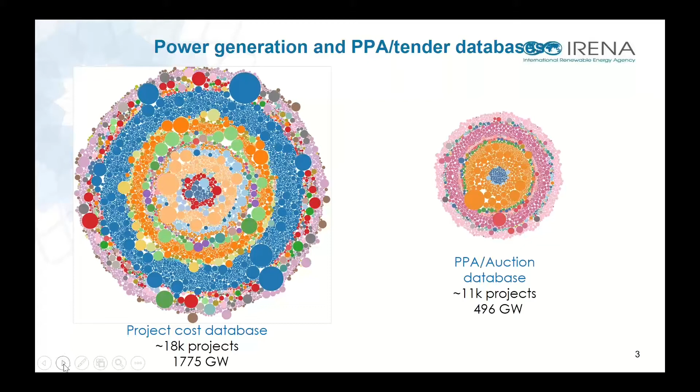In the project cost database, we have total install cost, capacity factor at the project level, and some assumptions for O&M and cost of capital. All that information is hidden in the PPA and auction database, but with the price of these tenders, we do get some interesting information. So what has been the recent cost evolution between 2010 and 2019 for newly commissioned projects?

This is a little bit complicated, this graph, but I'll take you through it because you'll see more of these bubble graphs. Each circle is an individual project. The center of that circle is the levelized cost of electricity on the y-axis. The diameter of that circle is the size of the project, to give you an idea of the scale. The bold lines are the global weighted average for each year, for each technology. On the right-hand side, you can see the declines. At the same time, we have the 5th and 95th percentiles for each year, for each technology. And finally, the fossil fuel-fired cost band runs directly across the bottom of this chart.

So you can see, don't forget about the mature renewables. They're obviously low cost, dispatchable, and help us integrate variable renewables. But solar PV cost fell by 82%, the levelized cost of electricity, between 2010 and 2019. CSP has come down dramatically as well, but is still, at least in levelized cost terms, relatively expensive in 2019. Wind technology is often now very competitive where you have onshore wind.

I just want to focus on the idea here that for the solar and wind technologies, what we've seen is really dramatic cost reductions. And I'm jumping ahead a little bit here, because the 2010 to 2019 values are these levelized cost of electricity. But on the right-hand side, you can see what the PPA and auction results tell us for out to 2021 and 23. So if we click on, hopefully...

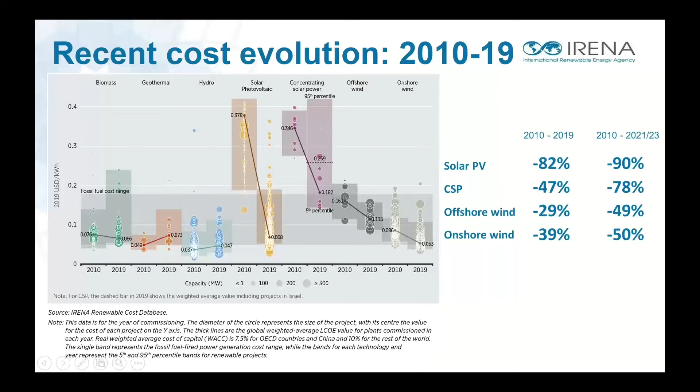This is really important for the energy transition because we see a bright future for CSP, given it can be a low-cost, dispatchable technology because of the low-cost thermal energy storage attached to it.

Okay, Jan, can you click forward one? Great. So what's going on, what are the trends driving this cost reduction, despite the fact we're only at around 6 gigawatts of deployment? First of all, it's a shift to CSP in higher resource areas, higher solar resource area.

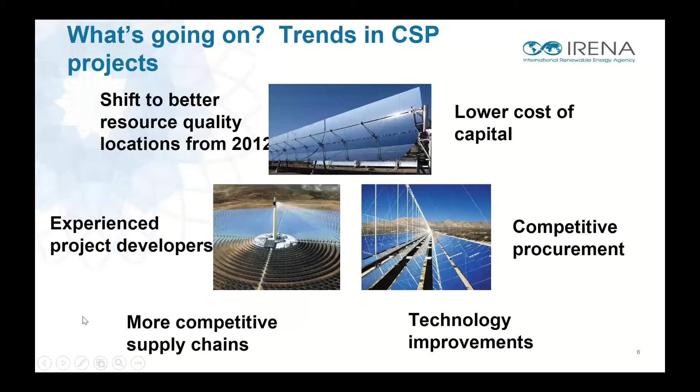We've got a broader range of experienced developers who've developed projects. We've got more competitive supply chains, although they could be a lot more competitive. And we've got the technology improvements that are coming through. Not to forget the importance of competitive procurement, which is really driving cost discovery. And we've seen low cost of capital in many cases.

I talked a little bit about how we think CSP is a very important technology for the energy transition, particularly for the integration of variable renewables through time. So we've looked at the cost reduction potential going forward as well. We've done this in conjunction with DLR, who have a fantastic set of experts in this area and great modeling capabilities. We've basically gone through a process of developing a reference plant, identifying cost differentials and local cost components, to look at where the technology could be with a significant increase in deployment needed to meet the Paris Agreement objectives.

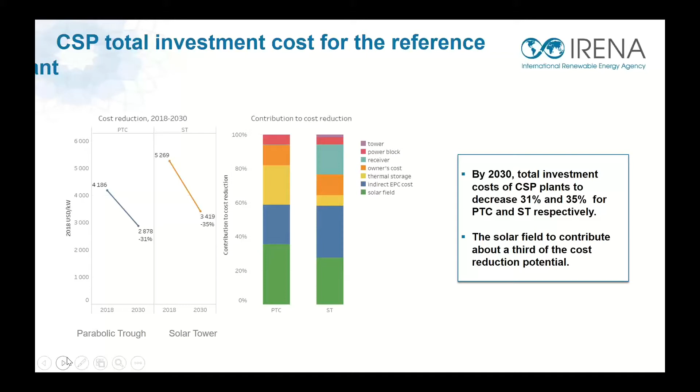And we see a continued potential for cost reduction for the technology of around 30 to 35% in terms of total technology costs, installed costs. The way in which that is unlocked varies a little bit between parabolic trough and solar tower, but we don't have time to go into that in great detail, unfortunately.

And what this means is if we look at the G20 countries with good DNI, by 2030, with this conservative cost of capital assumption that I mentioned of 7.5 and 10%, we can get to some very attractive cost of electricity for what is a dispatchable 24/7 technology.

And we've done extra work with other organizations to try and promote this outlook for CSP, and we released in February a report with the World Bank on this, on the market. So if we can get this growth and scale that is not there now, unfortunately, given the support is relatively weak, we see a very strong potential for cost reduction and a very important role for CSP in the Sun Belt and integrating very high shares of variable renewables.

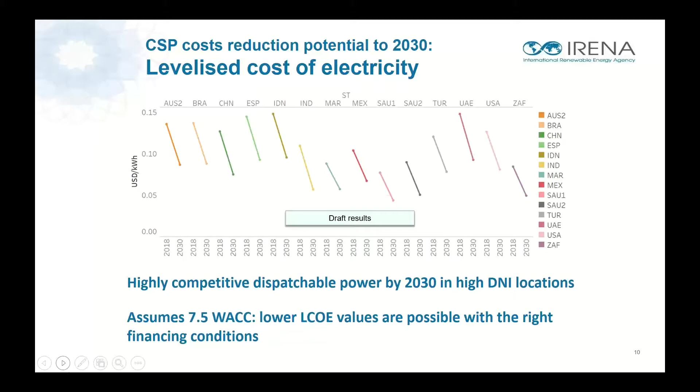But CSP has a little bit of a challenge in terms of it is considered slightly higher cost. It doesn't take into account the value of CSP, and we make that point in the report with the World Bank. But if you start to think about CSP in terms of firm dispatchable renewable energy, it really is all out on its own.

But like I said, CSP with the DEWA project in the United Arab Emirates is really all out on its own, and you have to remember again the difference in deployment between CSP at 6 gigawatts and PV at a lot higher. So does concentrating solar power have a cost problem?

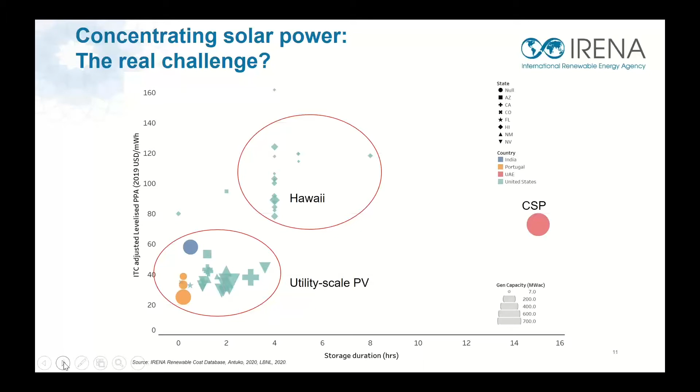Perhaps only if it isn't valued for the services it provides. We're very happy to be doing more work on the end-use sectors, and solar thermal heat we think can play an important part of that. If we're going to meet net zero, we have to do the end-use sectors sooner rather than later.

And we've been working with Solrico and Solar Payback to help fill in what is a really quite significant gap in terms of verifiable cost and performance data for solar thermal heat, notably for industrial processes. And we think this is an important process that will aid policymakers in properly considering solar thermal in the energy transition.

We're trying to do as we do for power gen, so collect project-specific costs and performance data, and end up with a representative database which we can talk about with policymakers and integrate into our models at IRENA, but also researchers can use as well.

We're balancing, as always, the difference between the depth of detail that we ask for and the rate of response. So we're trying to get just enough detail to understand the dynamics around costs in different markets for different solar thermal technologies, but it is a bit of a trade-off.

We're very pleased with the engagement we've had from all the suppliers that's been approached by Barbel and her team. We're up to around 752 data points for large-scale systems globally that represents 786 megawatts of capacity.

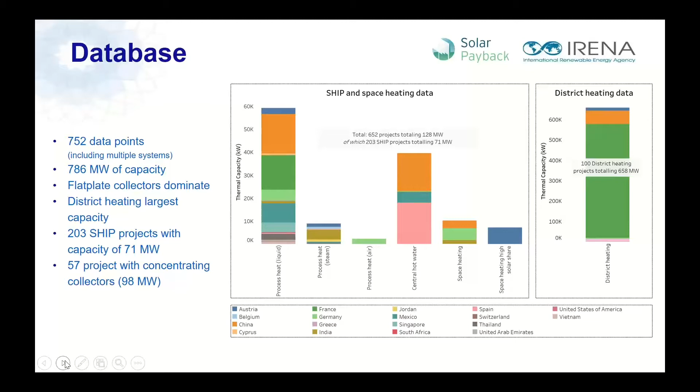Overall, the database is dominated by district heating projects because of the sheer scale compared to the other applications and the relative maturity of the market.

So we have some very preliminary results here that I'd like to share with you. We're in the process of finalizing this database and hoping to publish either before the summer or just after summer.

So if you remember back to the chart which I showed, the cost reduction, say for offshore wind or onshore wind, these are actually really quite comparable cost reductions for very small markets, actually.

So these results were personally a little surprising, but very encouraging considering these are markets that are not growing dramatically. If anything, they're shrinking. So it's very encouraging and tells us a little bit about what might happen if we had more support.

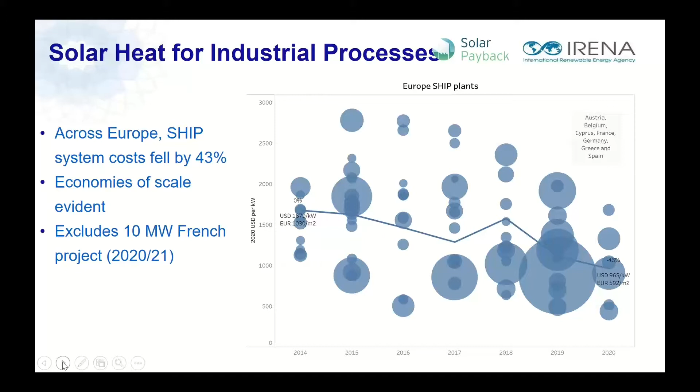Looking at solar heat specifically for industrial processes in Europe, where we can more or less assume we're making comparable decisions around boundary conditions and cost structures, again costs have come down, with evident impact of economies of scale. There's not a lot of projects, but this is the data we have, and it excludes the 10 megawatt French project, which we believe is being commissioned this year. If we added that in, the cost reduction wouldn't be 43%, it would be somewhat higher.

Translating that into a levelized cost of heat with some basic assumptions about a 25-year life and 1% O&M of CapEx, we get a weighted average cost of capital real of 5%, which in some cases may actually be quite high for some of these projects. We see a larger reduction in the levelized cost of heat because the share of projects shifts to areas with better solar resource, so yields are somewhat higher. So there's an even more significant reduction in levelized cost of heat for these projects, although still somewhat high, around US 76 per megawatt hour.

For Mexico, we've had really good response from suppliers sharing data for commercial and industrial projects, and we have good data to 2018, where we see a quite significant reduction in not only the install cost, but also a larger decrease in levelized cost of heat. Here, this is not so much due to projects with better resource, but better systems with greater yields. Unfortunately, the data for 2019 and 2020 is very thin and not really representative, so I'd caution that jump is probably not representative, and we're hoping to get additional data to flesh out those values.

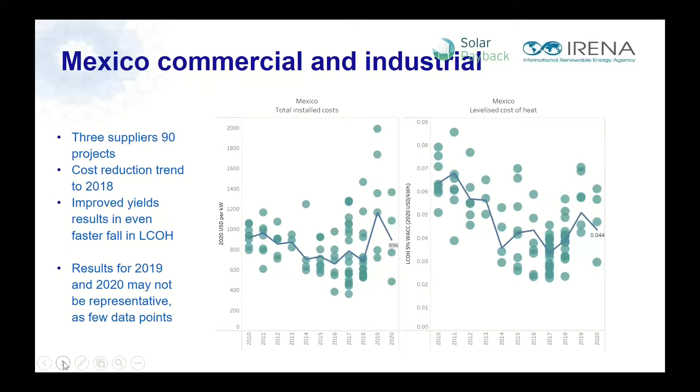So very encouraging data, very good collaboration with Solrico and Solar Payback. In fact, I'd have to say it's the gold standard as far as IRENA is concerned. We're having a great collaboration and really interesting data coming out of it, and we hope to round that out in the coming months, perhaps with your support. Thank you very much for your attention.

Thank you very much, Michael. This is very positive to see that on the CSP side, as well as on the solar process heat side, we are reducing the costs considerably over the last year. This is very promising, and of course we hope to see more and more projects going online in the coming years, to find out how we can bring down the costs even further.

So a brief background. Solarlite has been in this business for nearly 20 years. We introduce ourselves as EPC for parabolic trough collectors.

Parabolic trough is our core component. This is the only product that we offer in different dimensions, designed to operate with different fluids, etc. Our key innovations are direct steam generation. On the right-hand top, you can see a sky view of our parabolic trough power plant in Thailand, 5 megawatt capacity.

It's the world's first commercial DSG plant. And we have also been developing projects, not yet in construction, in the planning phase, to operate with molten salt up to 550 degrees C. I think the rest of the information, pretty much everyone knows it.

CO2-free modular design applies for all concentrating systems. And of course, research is a key integral topic in our company. At any given time, we have 2 or 3 R&D projects running together with key players in this field, like the German Aerospace Center or the CIEMAT at PSA, etc.

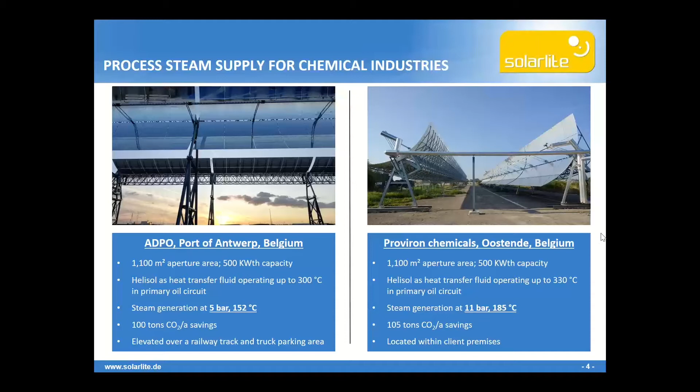So the key point here is: low DNI is not a big issue for the performance technically, and low temperatures don't matter as long as we design the system appropriately. By the end of the day, it's a matter of economics, and every case is different.

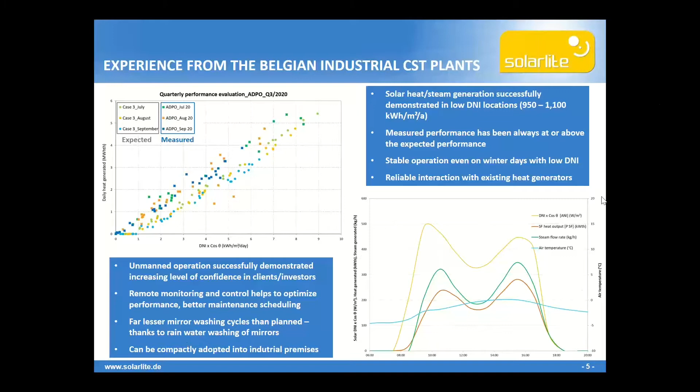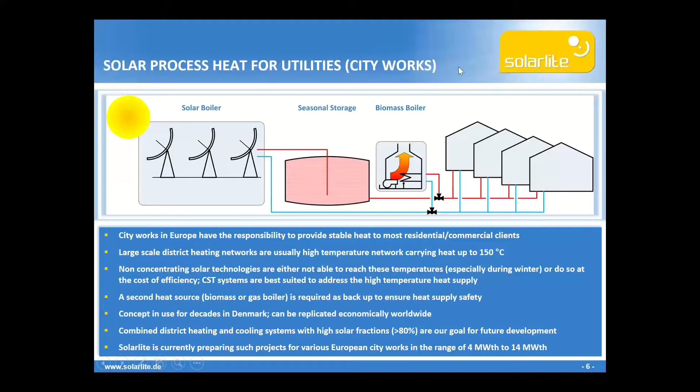And finally, regarding utilities, we are at the moment preparing to offer solar heat to high temperature city works, called Stadtwerke, in Austria, Germany, everywhere. They usually operate up to 140, 150 degrees. We are at the moment preparing 3-4 projects in the range of 4 to 14 megawatt thermal, to apply solar heat, pressurized hot water to these networks, to show we can pretty much integrate into any application and do our best. That's it.

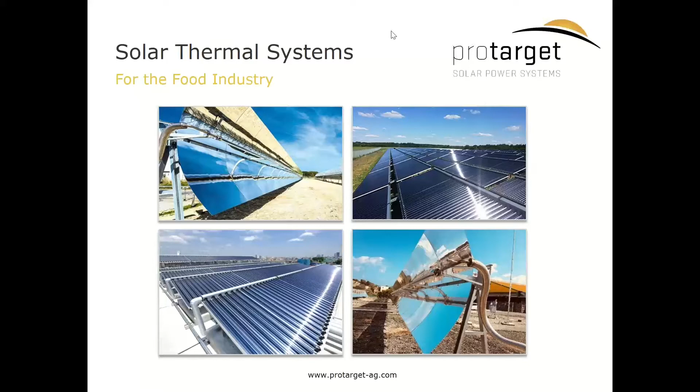A few words about Protarget AG: our company was founded in 2009, specializing in solar thermal systems for industrial process heat and steam generation. Today we offer mainly two solar thermal technologies. One is vacuum tube collectors, so-called CPC collectors, to provide hot water up to 100 degrees to industrial processes. The second technology is CST, using parabolic trough collectors, to provide process heat and steam of up to 420 degrees.

I will now show you an example where we basically used both technologies to provide a food producer with steam and hot water, and show you a bit more about the levels at which these technologies can be integrated. What you see here is the company KEAN, an orange juice or fruit juice producer in Cyprus, very easy to spot when you fly into Cyprus because all the roofs are orange.

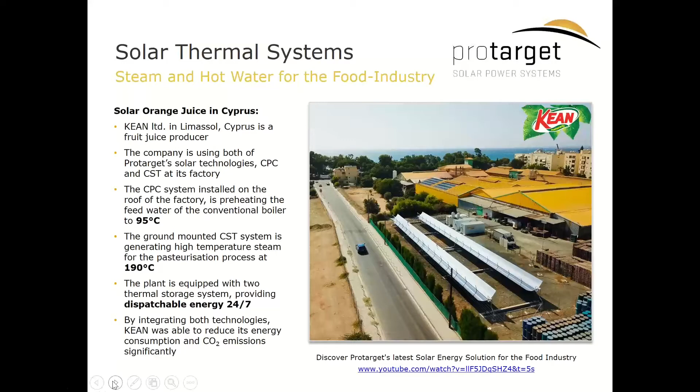On top, you see the parabolic trough solar field, which heats thermal oil to 420 degrees, which is then converted in a steam drum to 190 degree hot steam that is used directly in the production line, in the pasteurization and packaging line of the company. This system is also equipped with a storage, a so-called CTES storage, which uses concrete, storing the energy at a very high temperature level, also to be able to provide thermal energy 24/7.

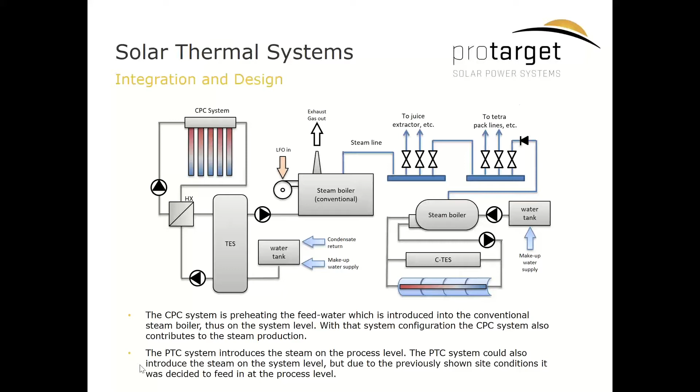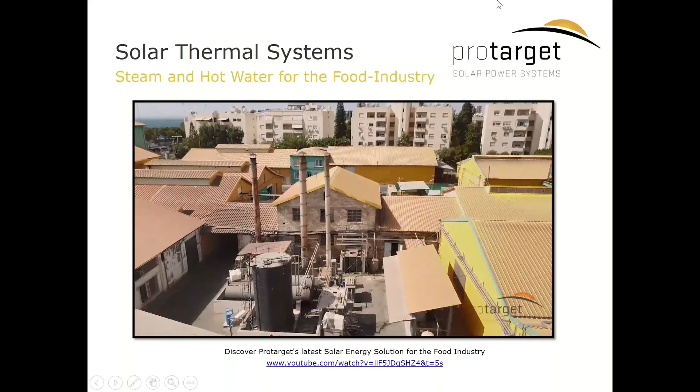I have a short movie for you to show you how this all looks in reality. So you see the roof installed CPC system.

Okay, we have to come to an end. And now the internet died. Not for us, but we have to come to an end. Can you try to start it, Jan? Yeah, I'm trying to start it.

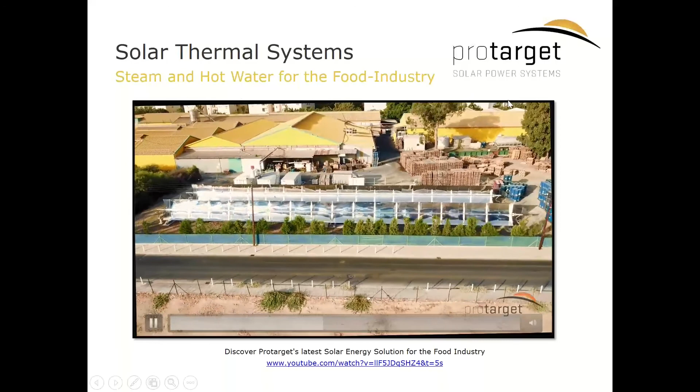Okay, on the left side you see the existing fuel boiler, a nasty dirty piece which you find in most industries still working. Right next to it is the parabolic trough plant feeding directly on the process level into the production process of the fruit juice company.

Okay, thank you very much. I had to cut this a bit short. Can you hear us? No problem. Okay good, because we had a major technical issue in the beginning of the presentation. Yes, thank you very much.

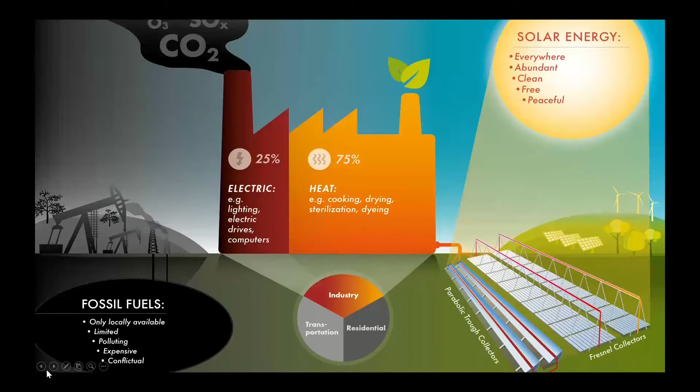That's why our company, Clean Industry Solutions Holding, holds 2 subsidiaries: Industrial Solar and Solar Spring. Solar Spring is an international pioneer in the field of membrane distillation, offering innovative waste and drinking water treatment technology.

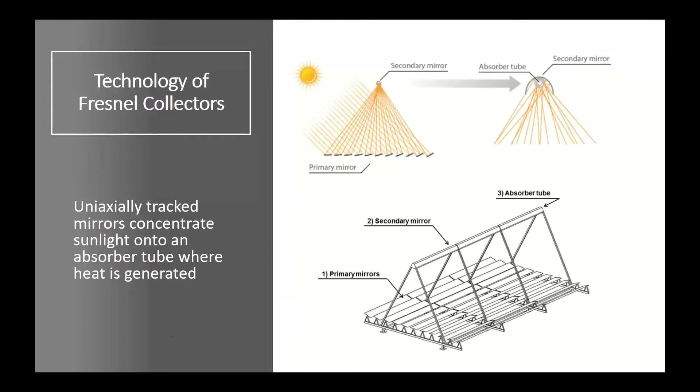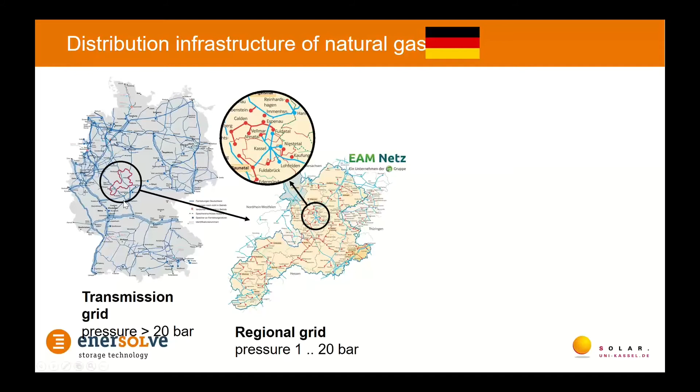Here you see a map of the transmission grid on the left side in Germany, of the gas network with a pressure above 20 bar. If we zoom in around the region of Kassel, you see the regional grid, and all the dots on this map are so-called gas pressure regulating and metering stations. It's the interface between the different pressure levels in the network, similar to a transformer station in the electric grid.

In Germany, we have above 5,000 of these stations all over the territory, with a heat demand of about 1 terawatt hour a year. What's very interesting is that the temperature range for the heat supply for these stations is around 30 to 80 degrees, so it's very interesting for integrating solar or renewable technologies.

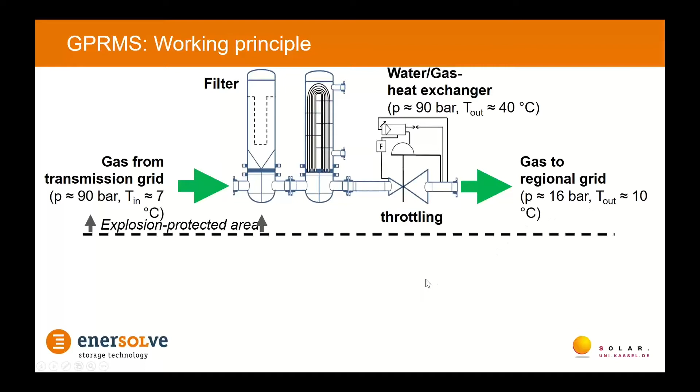Here you see on the left side the gas coming from the transmission grid at high pressure. The gas is filtered and throttled, and at the output of the throttling you get a lower pressure, and if you don't do anything, you'll get a negative temperature, in this case minus 20. So what is done to avoid that is to preheat the gas with this gas-water heat exchanger, and the state-of-the-art system does this with gas boilers.

Approximately 2.2% of the energy flowing here in the form of gas will be used to preheat the gas, and for large stations you can have up to several gigawatt hours per year of heat demand. Here you see a typical heat demand profile of a station, and you have a strong seasonality, with a ratio of 1 to 5 between summer and winter. Of course this varies depending on the station.

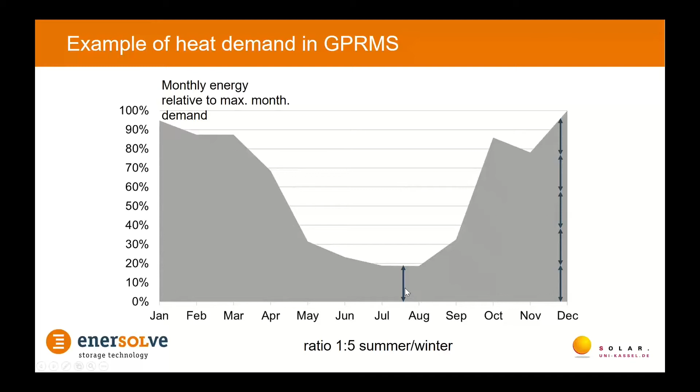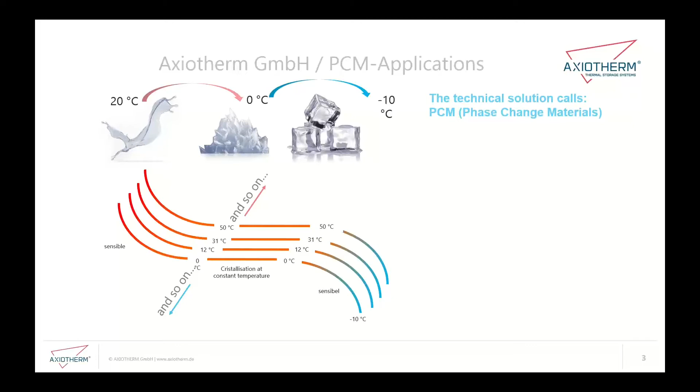So it's necessary to have other PCMs, phase change materials with different temperatures, higher or lower. Everything, we have. And what is the big benefit? We have the highest energy density at this heat transition point.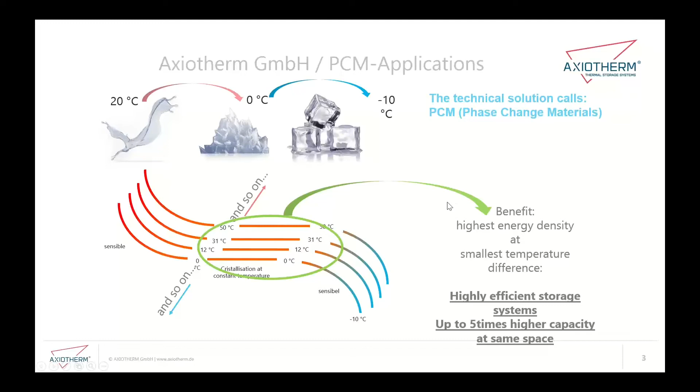At this moment, we have the smallest temperature difference and can realize highly efficient storage systems with up to 5 times higher storage capacities in the same space compared to, for example, sensible systems. The technical application is very easy: just take something like a vessel, put in our macro-encapsulated phase change materials, let water flow through, and we have a ready for work phase change material storage system.

The first project I'd like to show you is a PV to heat project in Denmark, together with the Suntherm company. We have 23 houses, each with a heat pump, a PV system, and a PCM storage system. They are all connected by a web cloud system management, and we have the feasibility for weather and electricity prices. We realize maximum PV self-consumption and minimum electricity costs. One main point is that we increase heat pump efficiency by up to more than 42%.

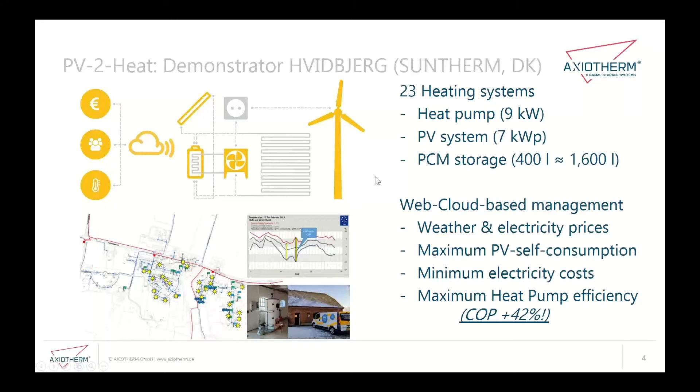This is a fantastic value. You can't reach this with a technical modification alone. We have also realized this technology as district heating, so you can see there are a lot of chances.

The next project I'd like to show you is PV to cold. Cooling energy is very important for the future because we will have a lot of demand for cooling rooms, and cooling energy is around 5 to 6 times more expensive than heat energy. You can see a 50,000 liter storage system in the Futurium, in the center of Berlin, close to the Bundeskanzleramt. We have 5 tanks, each with 10,000 liters, optimizing the technical building systems.

We use peak load reduction, for example for events where you need a lot of cooling power, by peak cutting shifting. What is peak cutting shifting? Very easy. You see the red line there, and this is the highest power of the chilling machine. If you have an event and need much more power, what do we do with the peaks? We just cancel, or cut the peaks away.

We store this energy beforehand in the PCM storage systems at 12 degrees Celsius in this case. Then, if we need much more power, we start to deload the storage systems and have enough power to cool the whole building. By this, we have maximum self-consumption of the PV system, because each watt we produce goes directly into the cooling storage. We have maximum COP through load shifting, with the PCM at 12 degrees Celsius.

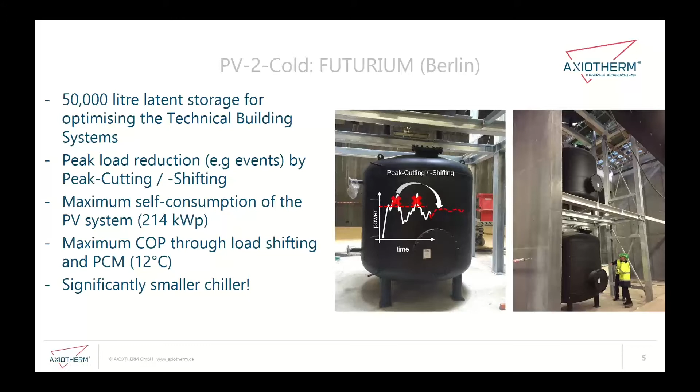It's close to the chilling machine, an absorption machine at around 6 degrees Celsius, and the small temperature difference is a major advantage. We have a significantly smaller chiller, which is very important economically. You can see another picture on the right side. And now I'm ready, thank you very much.

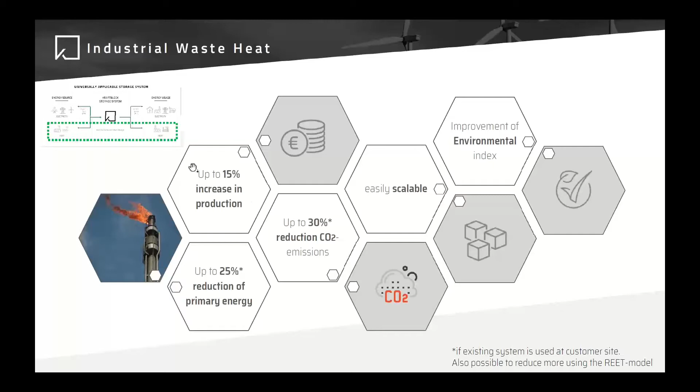I will not show now the pilots in those industries, but one application we really like and our customer likes is a mobile storage system. This is a very small container, 7 cubic meter container with the whole system, and it stores 2 megawatt hours of useful energy at a 480 degrees C level. So very compact, high energy density for a sensible system.

I don't do anything, so let's skip through the slides. Let's see if it works now.

Okay, so we call it renewable energies in existing technologies. Why? Because we usually try to replace, for example, a conventional fired system against a renewable supported system. This could be CSP, this could also be renewables from renewable electricities from PV or from wind farms. This is quite attractive also to our customers, mostly outside of Germany, because there are also subsidies which support those solutions. But that's definitely highly interesting.

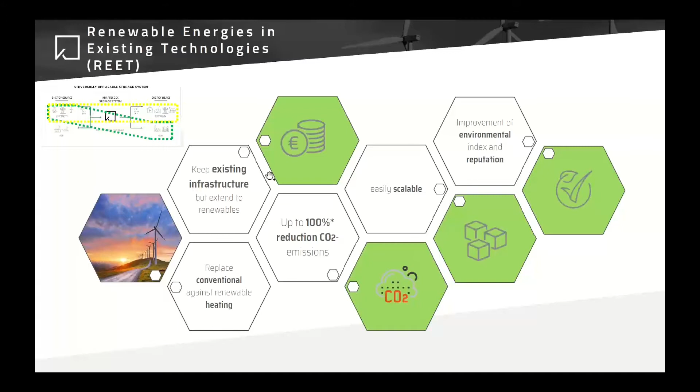What we are also looking for, I would like to present a project in this scale, but it's not allowed yet. It will take 3 or 4 weeks, then we will show the results.

CSP is also very interesting for us, but not, let's say, the old way of CSP using molten salt as heat transfer media and heat storage system, more the new applications which are using also hot gases as heat transfer media and targeting temperatures like 1000, 1200, 1300 degrees C, because there our storage system is really the perfect fit to those systems.

The interesting thing about our storage system is also that you build the system like an open technology system. It means you can charge it by thermal oil, you could charge it by molten salt, you can also charge it by hot gases. So it's a universal range. It could be charged. Of course, you have to tailor the interfaces, but the internal of the storage is always the same.

What we started actually a couple of weeks ago as a joint project together with UPC, DLR, SPF, and a couple more partners, is the advanced thermocline concept for thermal energy storages. At least it means it's a combination, a hybrid system using our solid state material as a cheap but highly efficient filler, in combination with molten salt technology, in order to reduce the costs of those systems.

So I think we are very well aware of the opportunities for the future, especially for CSP. We try to build our storage so that it could be used over there, and hopefully it will. Thank you.

This can be either steam directly, then process heat, or re-electrification or compressed air, or as we have in the Eni project, a combination of this.

The battery system is modular. You see one module here, a 20-foot container. We also have a 40-foot container made of a special Coca-Cola recipe concrete developed with Heidelberg Cement, and stores approximately 2 megawatt-hours each module, and then you size just the battery to whatever is needed for the specific application.

The applications are quite vast, so we have on the left side industrial applications like the electrification of industry, or just waste heat recovery from steel plants, for example, or ceramics, then flexibilization of power and heat generation. And you see here on the right-hand side the case of the concentrated solar power project with Eni.

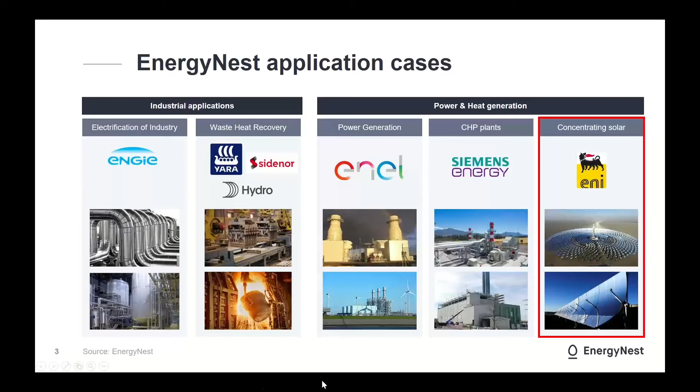The moving of the page is not really easy. Okay, so coming to the specific project of Eni, we're actually quite happy with this project because it's sort of a showcase. Eni having also within its decarbonization strategy to be carbon neutral by 2050, converted the crude oil plant into a big biorefinery, and with our thermal battery, we then add to this by further greenifying this facility.

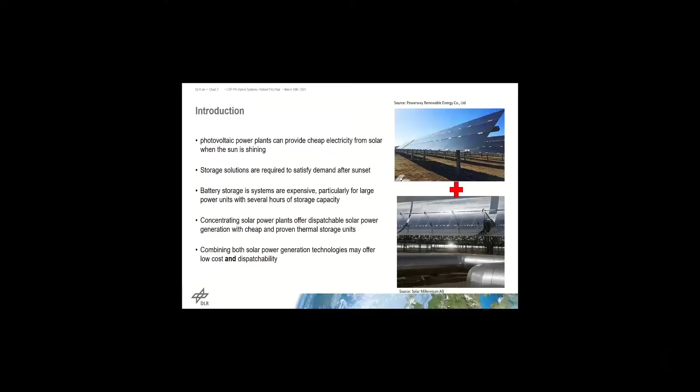Okay, the talk is on solar hybrid CSP PV technology. The question is, of course, why we are thinking about that. Some of the facts that you are probably all aware of is that today photovoltaic power can provide very cheap electricity during sunshine hours. We have achieved costs that are in good solar sites even below 2 cents per kilowatt hour. However, in order to supply energy after sunset, storage solutions are required.

One of them is, of course, the obvious one, a battery storage system. But we all know that this is still relatively expensive, in particular if we look for very long storage hours, for many hours of storage, 5, 6, 10 hours, then these systems become a significant cost factor that is far above the cost of electricity production.

On the other hand, concentrating solar power has typically an integrated thermal energy storage system, and in this combination, we will talk on that a bit later, storing of energy, shifting of energy is a very efficient and cheap option. The talk is then on the question, can we somehow benefit from the combination of both, integrating the technology?

Start with the PV power plant, a very simple sketch here: the PV system directly connected to the grid allows the lowest levelized cost of electricity, but as I mentioned before, it's actually non-dispatchable. If we have a battery, then we have to consider investment costs for the battery system in the range of 200 to 400 euros per kilowatt hour. You may keep this number in mind when we later on talk about the cost of thermal storage.

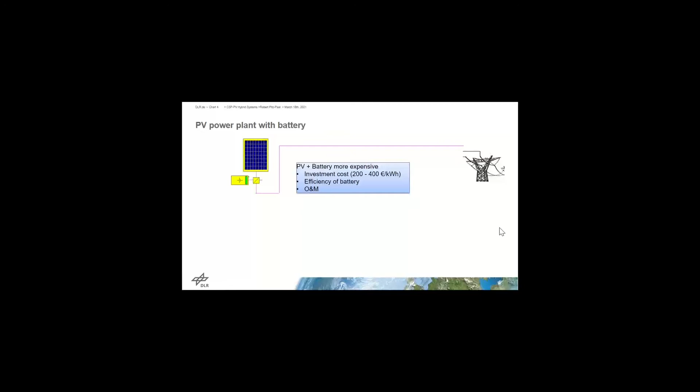We are not only paying for the battery investment, but we keep paying also a bit for the efficiency loss in the battery. So putting energy into the battery and back gives us some losses. In addition, of course, we also pay for the operation and maintenance, in particular for the fact that the lifetime of the battery is actually not the same as the lifetime of the PV module.

On the other hand, you know the concept of a CSP plant. CSP, in this sketch, a parabolic trough system, is linked to a thermal energy storage two-tank system, as it's shown here, with molten salt. The storage, the salt, is stored.

Sorry, can I go back? Not sure how to do it. It was not moving by itself. Juliana, can you switch this back? Oh, yeah, I will hand over. Jan, can you please switch the slide?

He's in charge. Back, okay. Not forward, please. It's not going back. Oh, you want to go back? Okay, back please. One slide back. Yes, exactly.

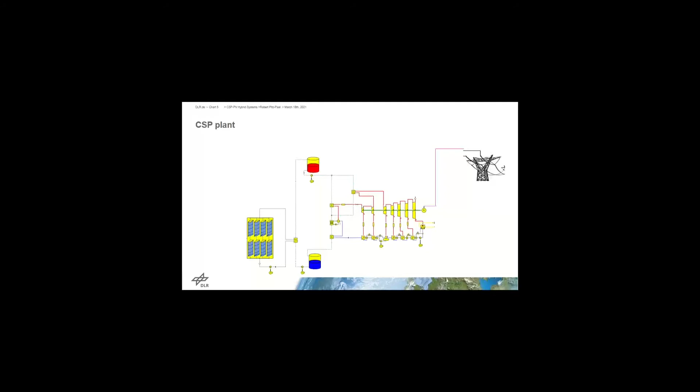So we are talking about CSP and the integration of a thermal energy storage. Let me show you the benefit or difference between integrating a storage in between the collector and the energy converter. This comes if you consider that a solar system provides high temperature heat for about 2,000 full load hours a year to a power plant.

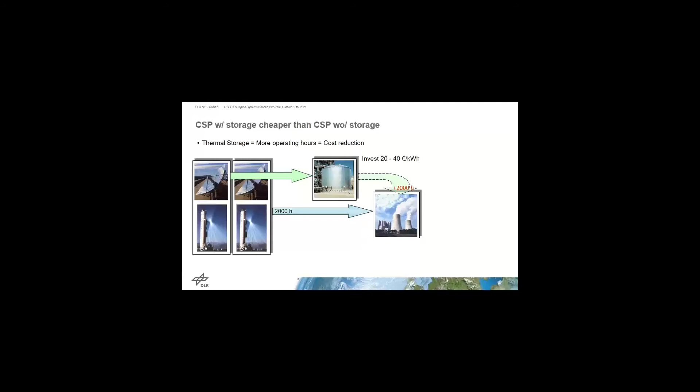If you add a second part of a solar field that provides energy at the same time to the storage, the power block can actually produce energy for a longer period, maybe hold through the night, 4,000 hours. This is by adding an investment in the range between 20 and 40 euros per kilowatt hour, a factor 10 lower than the investment in battery. So the cheapest CSP electricity cost is not at no storage; rather, costs get lower if we integrate a storage and operate the plant for more hours of the day or year.

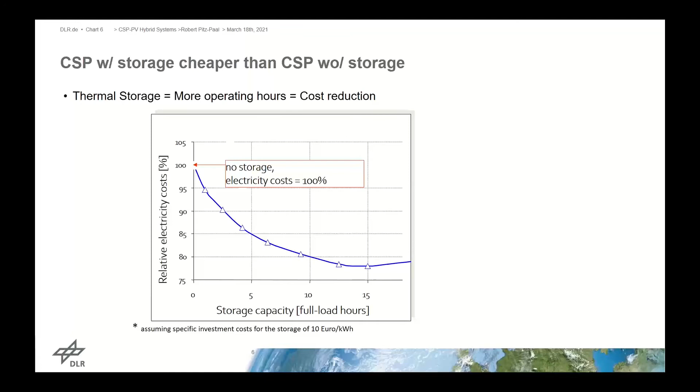So the question is, if we really want a system where we have to provide a certain fraction of power production during nighttime, or where we have a time-of-delivery tariff that favors nighttime production, then combining both technologies may get us a cheaper system through the combination of these two options. So let's take a look.

Next slide, let me see that. Not moving now, not sure how this movement is performed. Can somebody shift the slide now? I can't. Yes, thank you.

So the combination of both systems may work in a way that the CSP system and the PV system both provide electricity to the grid, but in addition, some of the PV electricity may be integrated into the thermal storage. This may seem counterintuitive at first, because the efficiency chain of converting electricity to heat and back to electricity is not very favorable. But when we consider the cost situation in combination, we see there is actually a benefit of this option: the electrical heater adds energy to the thermal storage in case there's surplus energy.

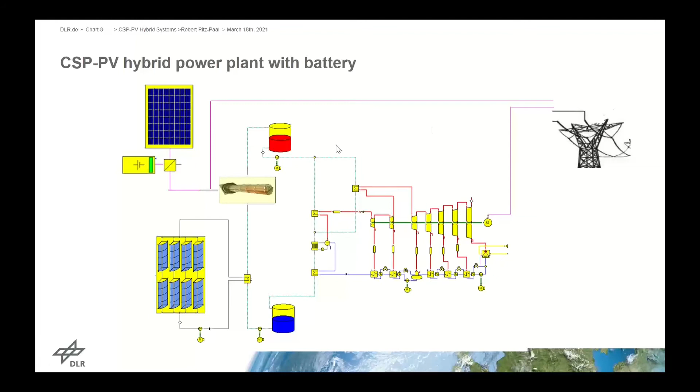Let's take a look at the next slide. A general layout: we can distinguish between two options. One is that the CSP plant and the PV plant may be connected to the same grid and operated in a way that they match the load. But if we co-locate them, there's an additional benefit: we can access the same grid and share the same grid access.

We can share the storage options, we can share the O&M team, we can simplify the project development, site preparation, environmental impact studies, and other things. We can also provide more flexible bids to the grid because of the better integration. All in all, this may lead to an increased profit in the concept of this hybrid system.

Hopefully we can move to the next slide. Let's look at the components of such a system. Of course, it's a more complex system: we have a PV system, maybe in addition a smaller battery storage as an option, we have a solar collector, an electrical heater system, a thermal storage, and we also have a power block.

In many cases, it's very beneficial to combine a single-axis tracking PV system with the system, because they provide a very similar daily pattern of energy provision compared to a parabolic trough system. We will see later that this is of certain benefit here.

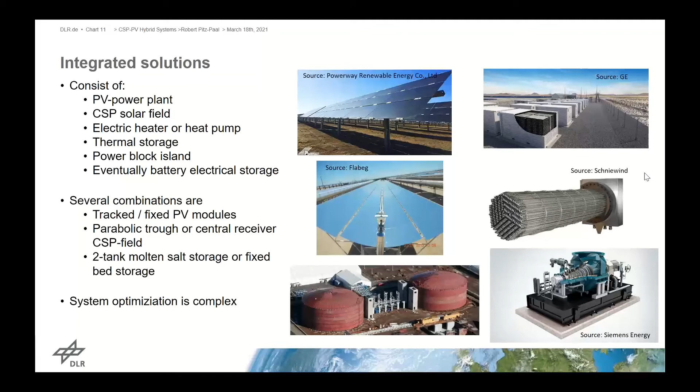So in this case, where we integrate a parabolic trough and a single axis tracking PV system, there's the chance to put the heating of the molten salt in a serial arrangement. First, we heat the salt with the parabolic trough to a certain temperature, then we add additional temperature with the electrical heater. It's important that the energy is provided consistently during the day, and single axis tracking PV and CSP systems have similar characteristics, so this matches well. The benefit is that the temperature limit of the parabolic trough, due to the heat transfer fluid and concentration, can be significantly increased, allowing the power plant to operate at an elevated temperature with better efficiency.

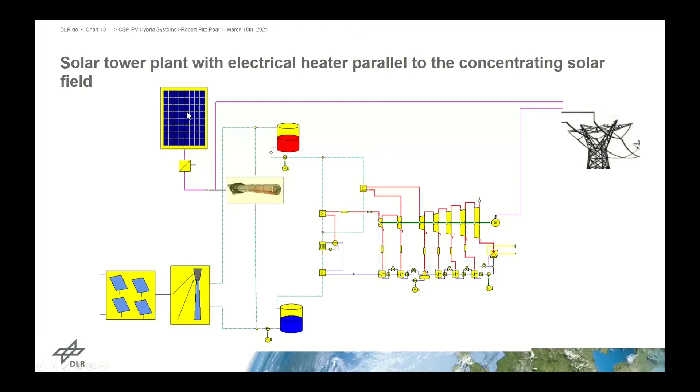The other option is to connect it in parallel. In this case, the heat production and the production by the electric heater are put in parallel, and we can independently charge the storage from the PV and from the solar field. This may be the case because the optical characteristics of a solar tower and of a PV system may be different.

So how can this actually work? When we want to provide base load power, during the daytime we have energy from the CSP plant and energy from the PV system. Typically both systems are designed so that during the nominal time of day, excess energy is available, and this excess energy is provided to the thermal storage, or maybe to the battery storage if a smaller one is available. In this combination, energy from the battery storage or thermal storage can be used to operate the plant for longer hours after sunset, or around the clock. Both fractions of this energy input can be combined this way, and it's a question of optimization how large the contributions of the two systems are—it depends very much on cost, efficiency, and so on, so there's no general answer.

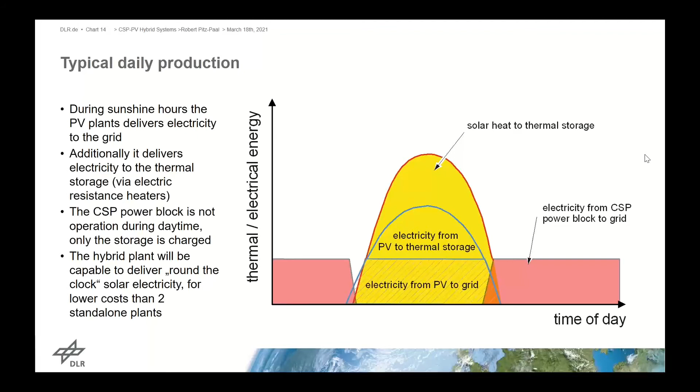One additional benefit relates to auxiliary consumption coverage. CSP plants, when operated during the day but not producing electricity, don't have the power to operate their auxiliary units—the pumps, heliostats, or collector tracking. The combination of the two systems gives the chance that even when the power block isn't running, energy for the auxiliary units can be provided by the PV system. So both systems run independently, and auxiliary power consumption is covered by the system itself at all times, not by the grid.

So, what is the optimal system? There are many degrees of freedom you can use, and the optimum always depends on specific boundary conditions—what power demand is needed, the price of components, and many other aspects. I'll show an example here, which isn't fully representative, but illustrates the factors you can play with.

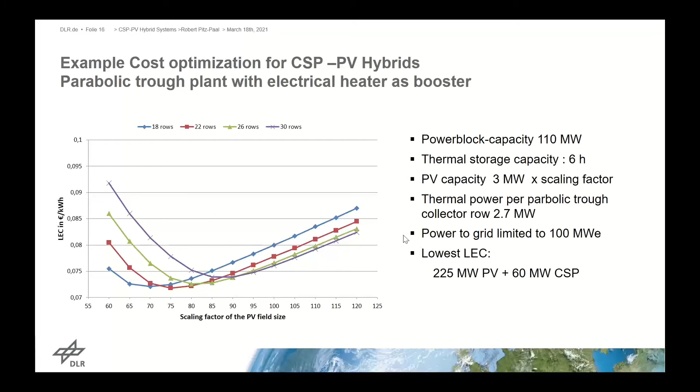Okay, this is just the conclusion. Well, I hope I could show you.

We have some, okay, microphone here. I think Stephanie Randig tries to get in. We can hear you. Unfortunately, you might switch off the microphone and turn on the camera if it's possible.

Thank you. Okay, just to conclude, I hope that I could show you that these combinations of CSP PV hybrid power plants have really a chance for a low-cost, cheap dispatchable solar electricity supply by optimizing both systems in a way that they perfectly fit to the load curves that you want to do, and you can do this cheaper than with a simple CSP system with storage or with a PV battery system.

Of course, the system looks very different depending on how long the storage capacity or the load is actually needed. And of course, the system also depends very much on the subsystem's cost. As we see a very quick development on these costs, it's very difficult to say this is the perfect optimum solution. It may be a year from now different in the cost situation, and then a different optimum solution will be there. But as you also could see, these kind of optimums are relatively large, so it's not really a problem, and you wouldn't do very big mistakes in this design.

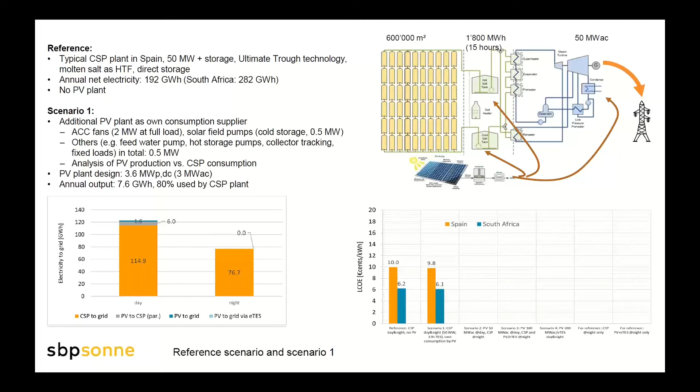With scenario 1, as Robert mentioned, we assumed a small PV plant designed just to support the CSP plant and deliver its own consumption. With this small PV plant of about 3 megawatt peak AC power, we can increase the net output by about 6 or 7 gigawatt hours, and the LCOE finally decreases by about 2% for both locations.

With the next scenario, the second one, we reduced the solar field, the parabolic trough field, from 600 to 380,000, and doubled the PV plant capacity to 50 megawatt, so it can also deliver electricity to the grid during the day. It replaces the solar field of the CSP plant, while the CSP plant only charges the storage during daytime and produces electricity at night from storage. With this configuration, LCOE in Spain decreases significantly, by about 10%. In South Africa, it's also going down, to 5.9.

Then scenario 3 is also on this slide. We again increased the capacity of the PV plant, doubling it to 100 megawatt. As Robert mentioned, we can additionally charge the storage by means of electrical heaters during the daytime from the PV plant. In this configuration, the PV plant delivers about a third of the electricity at night, while the other part still comes from the CSP plant. At daytime, the PV plant delivers 160 gigawatt hours in Spain.

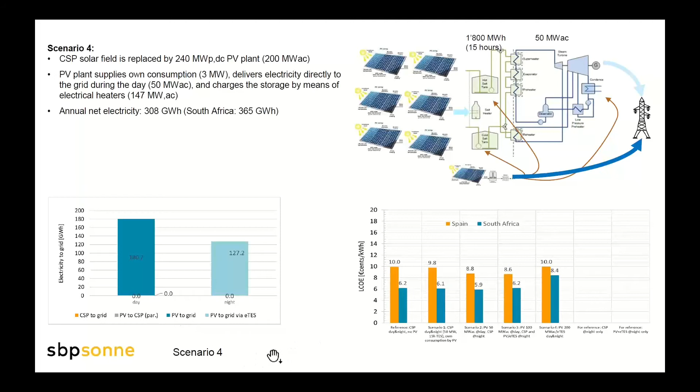Now, next slide, please. This is the final scenario, where we fully replace the CSP solar field with a 200 megawatt AC PV plant, which charges the storage via this eTES concept and delivers electricity to the grid in parallel during daytime. By this, the LCOE ends up higher than for the other configurations, both in Spain and South Africa.

So, I come to the conclusion. In South Africa, as an example of a very good CSP location, the most economic configuration is the one where the PV plant has nominal power capacity and delivers electricity during daytime, while the CSP plant delivers at night via the eTES system. The eTES concept is less economic at a good location.

In Spain, as a mediocre location, it makes sense to oversize the PV plant and also supply some electricity via the eTES system at night from PV. Nevertheless, for both locations, it's still correct that if we look only at the LCOE at night, meaning the plants are only allowed to provide electricity to the grid at night - which might not be a realistic scenario, but is mentioned just for comparison - the LCOE for the CSP system is much lower than for the PV and eTES system.

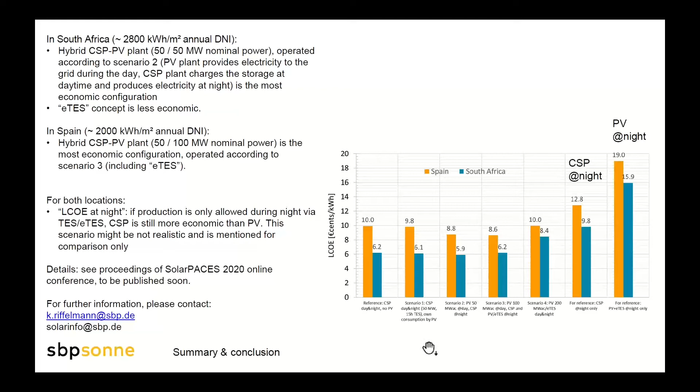I'd like to mention that the cost assumptions and other details of the study will be published soon in the proceedings of the last SolarPACES conference. You'll see my contact details here. If you have any questions, I'm happy to answer.

Thank you, Juliana. Hello, everybody in this web session. I'm going to speak about integrated CSP PV hybrid systems, what we call briefly ICPH, and in particular I want to focus on its fit to the green energy for hydrogen industry. Before I start, I want to emphasize that we always distinguish the integrated systems we've developed at TSK Flagsol, for instance for the application in Morocco, from simply co-located plants, because we believe and can show that those integrated systems are more efficient and more advantageous in terms of LCOE.

This integration has mainly two effects. The first effect is we increase the delta T between the cold and the hot salt, which means we can increase the storage capacity. And second, due to the increase of the temperature levels, we improve the efficiency of the water steam cycle.

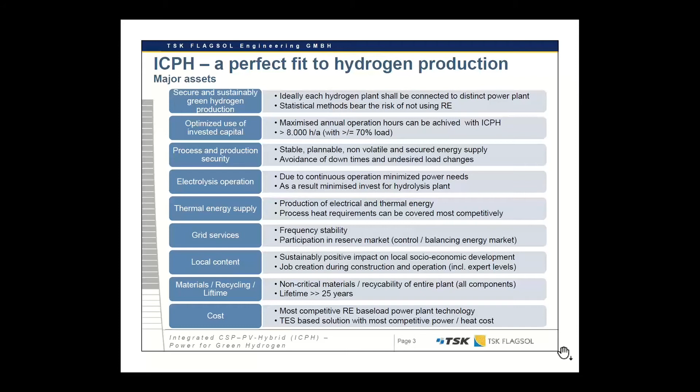I know that's a lot of information in 5 minutes, but I'd be happy to answer questions later if some come up. Thank you for your attention.

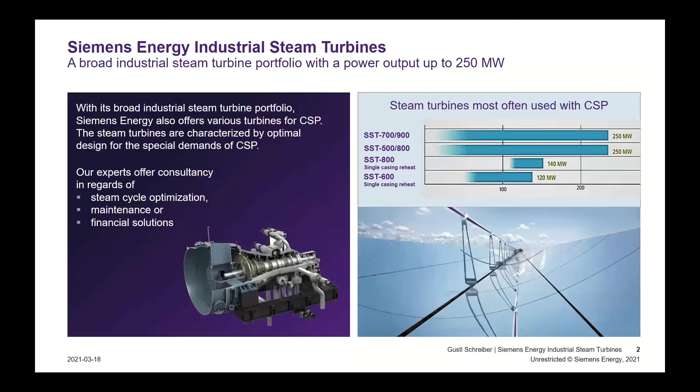With our broad steam turbine portfolio, we offer turbines for different types of CSP plants. In addition, we support the steam and water cycle optimization for our customers and help them find the best possible plant design.

Based on our experiences in the CSP market, we want to share our ideas regarding the integrated CSP PV hybrid concept. With this new concept of hybridization, an enhancement in performance can be achieved. In an ICPH plant, the molten salt is heated up in 2 steps. In the first step, the cold salt tank is heated by parabolic trough to a temperature level of 390 degrees Celsius. In a second step, a photovoltaic system and electric heaters are used to further heat the salt, reaching a temperature level of 560 degrees.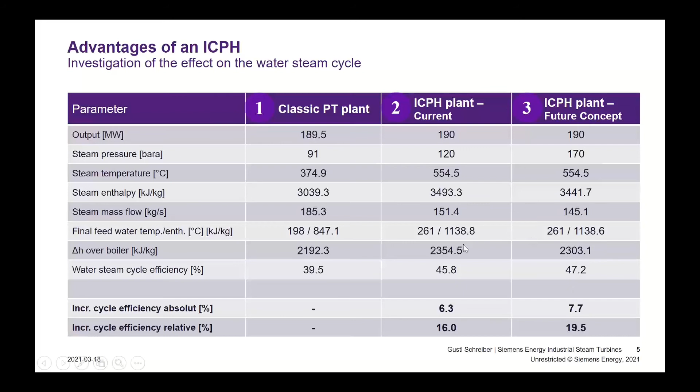Let's also look at the salt cycle. In the ICPH plant, the salt in the hot tank is heated up in 2 steps: step 1 by parabolic trough, and step 2 by a photovoltaic system and electrical heaters. In the classical design, we have a usable temperature difference of only 117 Kelvin. In the ICPH design, we have instead a usable temperature difference of 287 Kelvin, which is an obvious advantage. Comparing the classic PT plant and the ICPH design, we see a significant decrease of more than 60% in the needed salt flow and the salt tank design.

In addition, we have shown with our calculations that there is further optimization potential.

Now I want to summarize the advantages of the ICPH plant design. Due to the hybridization, we see significantly reduced salt flow and salt tank sizes. Because of a higher water steam cycle efficiency, the total amount of needed solar energy is reduced as well. In total, a reduction of the plant LCOE can be achieved, and the future concept shows further optimization potential.

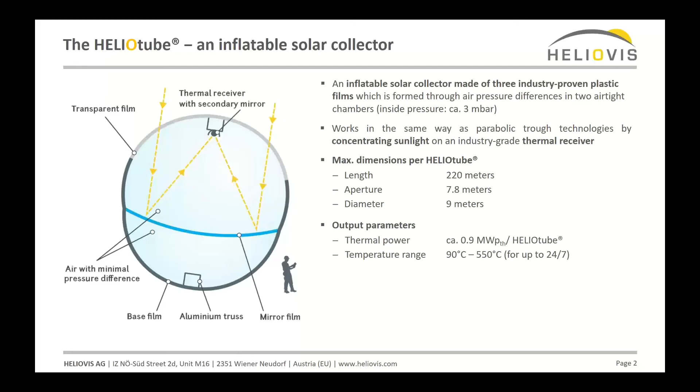The length is 220 meters, so that's the equivalent of 2 football pitches, and the diameter is 9 meters. Output parameters: we have 0.9 megawatts of thermal power per heliotube, in a temperature range of 90 to 550 degrees, for up to 24 hours with appropriate storage technology.

Now, the system has a number of specific features, and I'd like to focus on 2. One is the entire technology is designed for harsh desert conditions and maximum durability. And the other, due to the special features of the design and the materials used, we have 55% lower capex and 20% lower opex versus the standard parabolic trough technology, which leads to a cost of thermal energy that is really very suited for industrial process heat and water desalination. I'll say a little bit more about that later on.

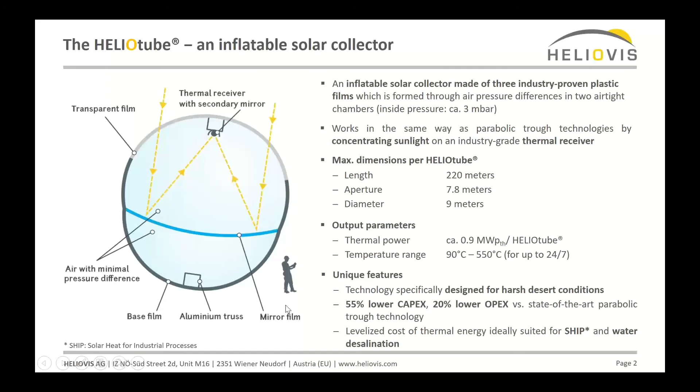Now, what is of course a little unusual about this is that our standard solar field would be 30, 50, or 100 of our heliotubes, and here it's only 1. Now, a really interesting market in which we're experiencing a lot of traction, next to the industrial process heat market, is this market for water desalination.

As I'm sure you're all aware, water scarcity is already an issue today, and it's becoming more pressing every year. It is being addressed with desalination plants, and the dominant technology, with over 95% market share, is reverse osmosis. This operates at high pressures, therefore needs to run 24 hours a day, and therefore requires constant energy supply. And since they run on electricity, they need baseload electricity.

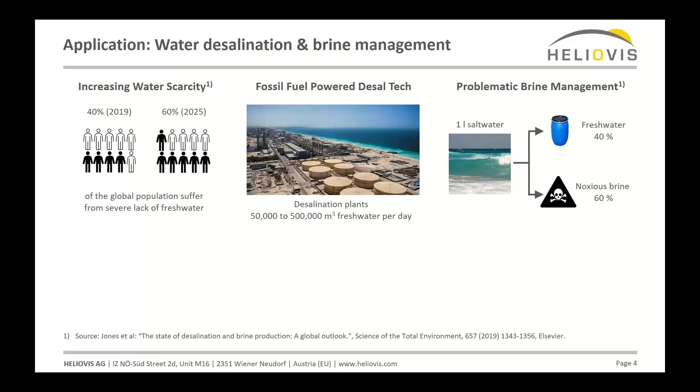Often, large plants are situated directly next to power plants, as in this case, leading to a heavy carbon footprint. The second issue that this technology has is that the rate of water recovery on global average is about 40%, meaning that for every 100 liters of salt water, you produce 40 liters of fresh water.

And 60 liters of concentrated salt solution, which is usually pumped back into the ocean close to the coast, where it leads to damage. So if we're going to tackle the global water problem with this technology, it's going to come at a heavy ecological price. And there are alternatives, and we can provide one of them together with a technology partner.

This partner has a desalination technology that runs primarily on heat and does not use any high pressures. Together we can deliver water at competitive price levels with very little or even no brine, no salt solution. And the system is self-sufficient in energy and therefore CO2 neutral, with the added benefit that we can work off-grid, which in many of our target markets with their infrastructure challenges is a great benefit.

We've developed a system based on standard units, which we can use multiples of and therefore scale the system. Each unit produces 6,000 cubic meters of fresh water per day, and we achieve recovery rates of up to 96%, the remaining 4% being basically wet salt.

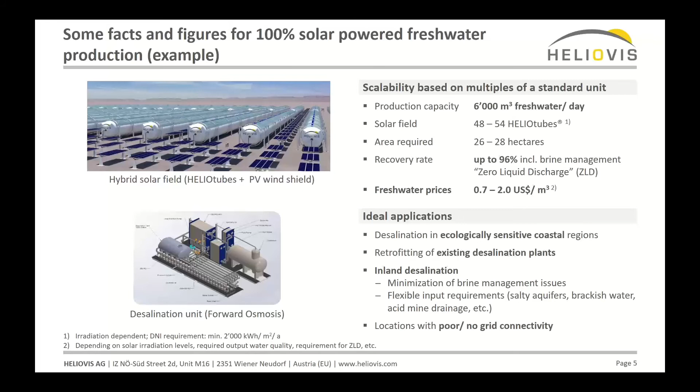We're currently working on our first projects, and I hope to be able to introduce these to you next year. With that, thank you very much. And if you're interested in our technology, we would love to hear from you. Thank you.

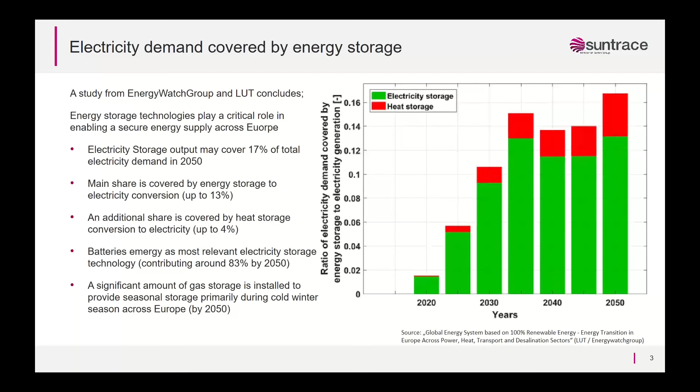It also involves, as they say, a significant amount of gas storage—considering green gas created from green hydrogen, for example—that could provide seasonal storage, particularly for Europe. But I don't want to emphasize this too much. The other part is, of course, not only about electricity, it's also about heat, and we've seen a lot of examples in the different presentations.

That shows that for heat generation, you would mainly be using thermal energy storage. Of course, you can generate thermal heat from electricity, but you can also generate it from other sources like CSP. Thermal energy storage for heat will cover a large part of the heat storage output in the years to come. Power-to-gas, green gas, will also contribute some part of it. But in particular, when it comes to phasing out fossil heat generation, that will definitely increase the requirement for heat from thermal energy storage.

You can see that the share where electricity is converted to thermal heat is not as large from an electricity storage as it would be from a thermal energy storage in the first place. Please go to the next slide.

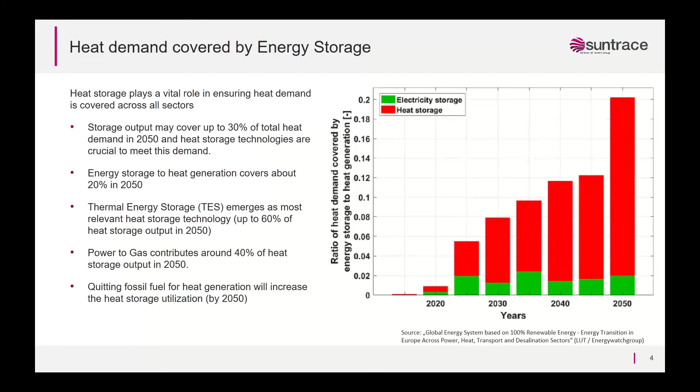They also say that effectively that can be done over the next 30 years, reducing the cost, both the levelized cost of electricity, LCOE, but also the levelized cost of heat. And that implies the use of storage.

A lot of discussion today is about energy storage being too expensive, with no business case and a lot of issues. But when we want to go to 100% renewable, we need business cases for storage and a scaling of the different applications. I found it intriguing to understand that for the energy transition in heat, and even in electricity, we need thermal energy storage, not just electricity storage.

As can be seen here, it's not about either or, it's both. Like previously, we had a lot of discussion about either PV or CSP - who is the winner of the competition on solar electricity? There is no winner in the sense that both will have some contribution, one maybe bigger and one smaller, but you cannot leave out one of them. The same is true for storage.

I wanted to bring this up as food for thought, to take our heads out of the individual project details and all the figures presented, and give a heads up that every one of us, presenters and the crowd, is going in the right direction. What I think we as a whole industry need to work on is removing barriers, getting a level playing field for those applications, and finding the funding and payment mechanisms that allow a ramp up of manufacturing and implementation of storage.

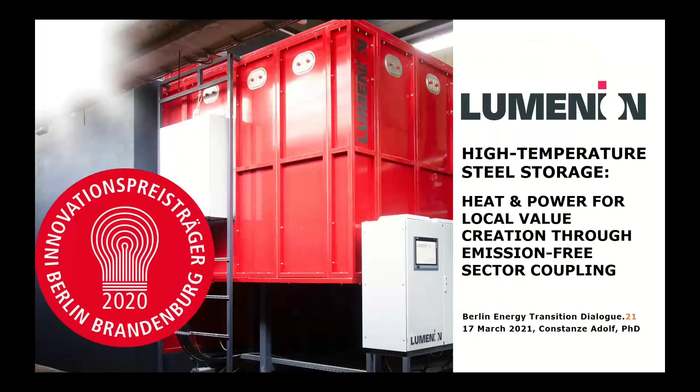And with that, we move now to a more detailed view on storage systems. We will talk about steel storage systems, high temperature steel storage. I'm happy to introduce Constanze Adolf from Lumenion. The floor is yours.

Hello everybody. I've got the challenging task now to keep you alive until we get to the discussion round. Martin, thank you so much - there's nothing to add from my side, because I'm so convinced of the challenge ahead. This afternoon showed very precisely that we have all the technologies. The puzzle is there, it's just the question of how to set all the pieces together to make 100% renewables possible. It's not about competition, it's really to show how complementary all those technologies are and how they are in a way needed.

Constanze, we can't hear you anymore. Can you hear me now? Yes, it works. I hope you heard my first part - I really thank you all for your great presentations.

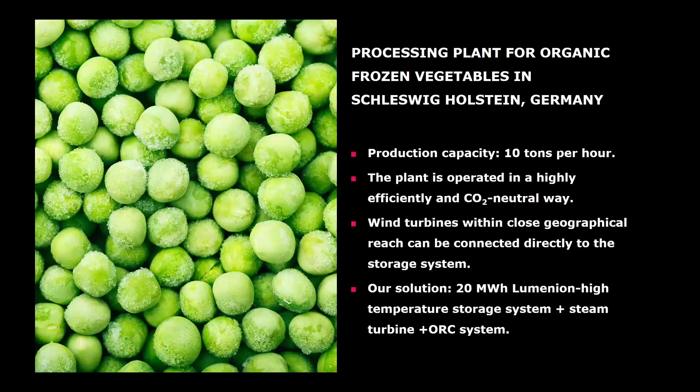I would love to take you further to one of the regions in Germany, Schleswig-Holstein, where you've got all the windmills and a huge level of curtailment. Here we will build a greenfield project, about to plan a 20 megawatt hour storage system for Europe's biggest organic process plant for vegetables, a freezing plant with around a production capacity of 240 tons per day. And what I like here, Martin, is this bringing systems together, having organic farming on one hand and renewables on the other. Sometimes they seem to compete about soil and land, but here you can really see that this all can go together.